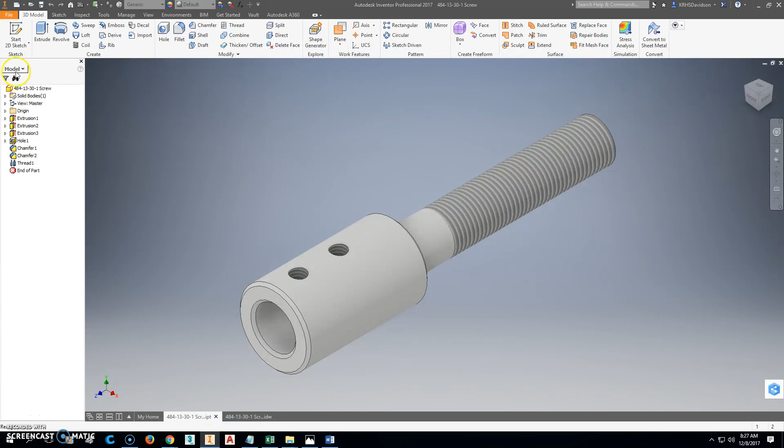Click New. We're going to start a new drawing there. Start a new sketch. Alright, so one thing I want to do is everything's going to be based around a center point. So I'm going to click this right here to turn on a center line. And I'm just going to draw a line that goes from here down here like this. And escape. And I'm going to say that the midpoint of that line goes right on the origin point. It's fully constrained. The length of this piece doesn't make a difference.

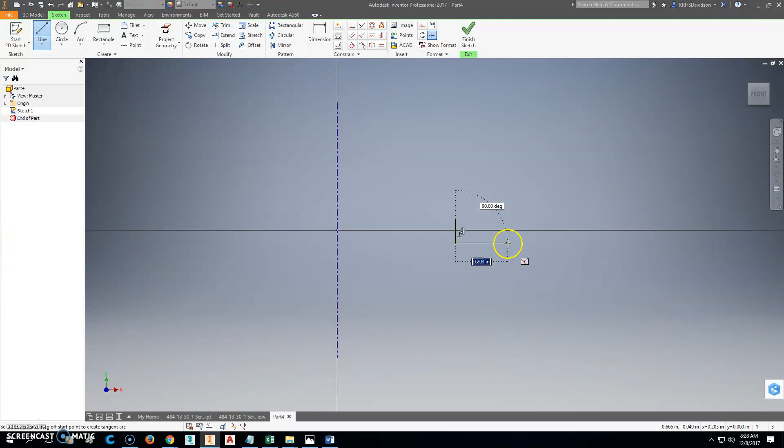So then we'll go out here and what I really want to think about is this part right here. I'm going to sketch that right there, and then I'm going to revolve it around that center line I just drew. So we'll go back out here, and I'm going to turn the center lines off, and I'm just going to sketch this shape like this. I don't know if it's exactly right, but that's kind of what we want it to look like. So that's the basic shape of that sketch.

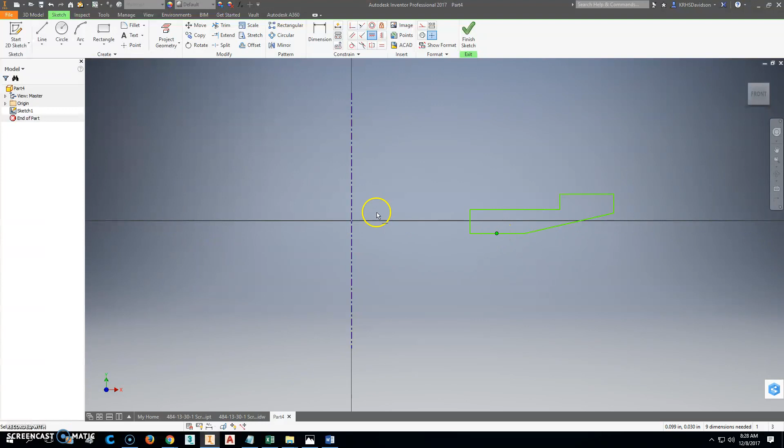As a matter of fact, I'm going to do a horizontal constraint between that midpoint there and the origin point. So that puts it up on that. So now we can start doing dimensions. Watch what happens. I'm going to click dimension. I'm going to dimension from this line right here to that point right there. And see how it puts that all the way out there? It's trying to tell me this is a diameter because it automatically knows it's going to revolve around that. And if I remember correctly, that was 1.2. So that one's 1.2, so that's good.

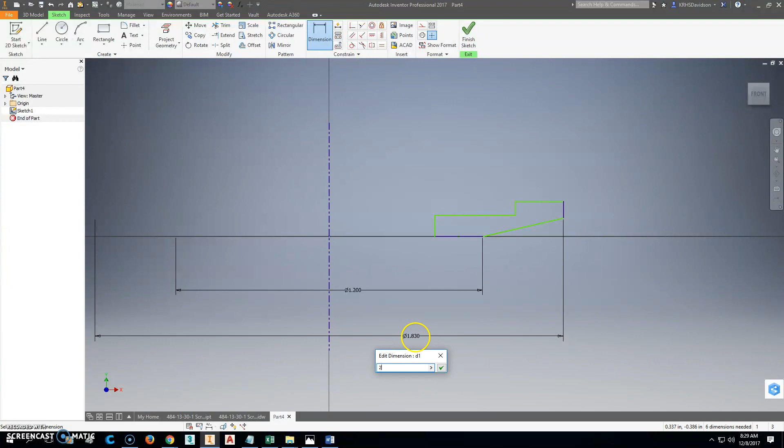Alright, that's 1.2. Oops, did I mess that up? So 1.2 is there. I'll do a dimension that goes from here out to here. That is exactly 2. Then we'll start worrying about these dimensions right here. So that's 0.02 thick right there. This is 0.12 and this is 0.25. So we'll dimension these pieces here. We'll put a dimension on from there to there. That makes that 0.25.

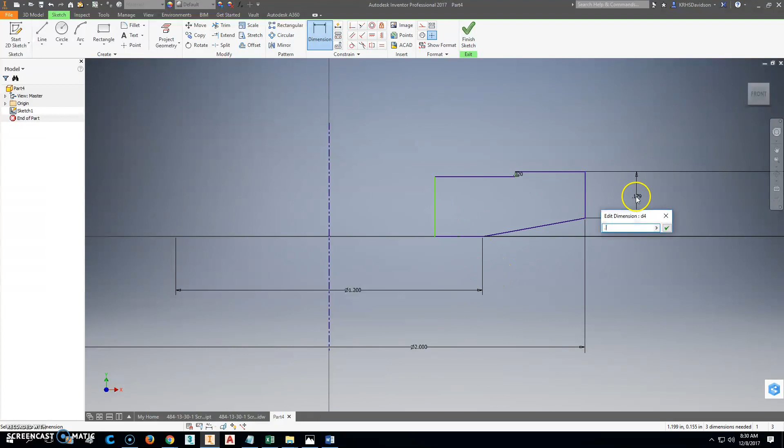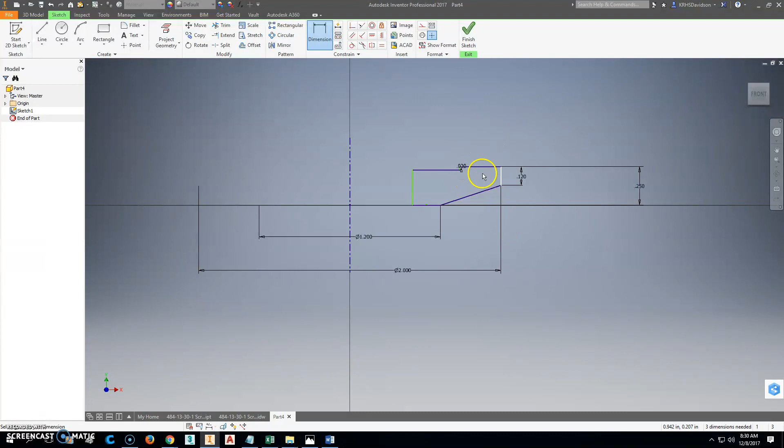This one was 0.2. No, 0.02, wasn't it? Let me double check. 0.02, correct. And then this part right here was 0.125, I think. Oh, it's just 0.12. So that's that. So 0.02, 0.12, and 0.25. Oh, and we need to know that dimension right there.

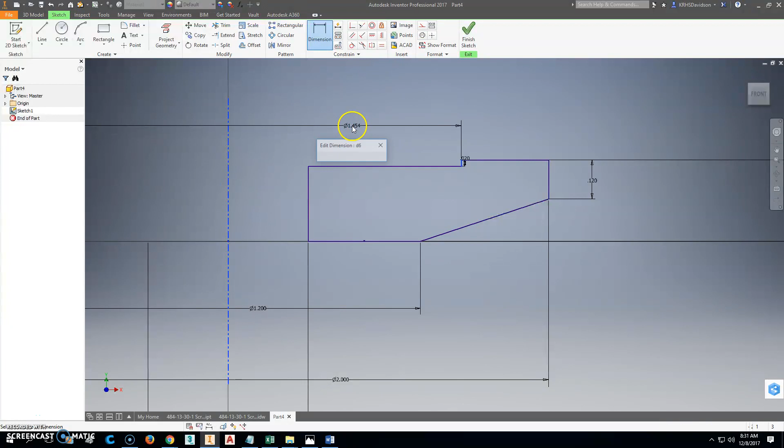That one right there still needs a dimension. So we're going to put a dimension that goes from here to here, and that was 1.5. Now it's telling me it needs one more dimension, but it's all blue, so I'm assuming it has something to do with that center point right there. So we'll finish this sketch. We will revolve this around that right there fully, and so that's it.

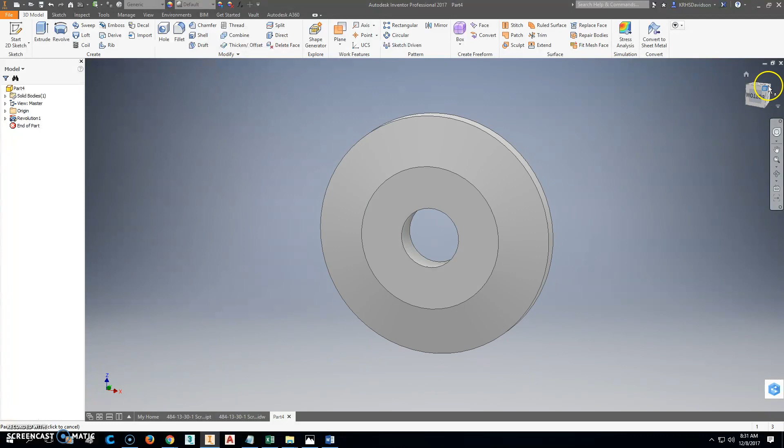That's our part. I'm going to change the view here to go up like this so we can see what that part looks like. I'm going to make that my home because that's what I want to look at. But we can also go this way and see what the back side looks like. That's what both of those sides look like. So you're good there. Save this part, and we're going to call it 484-13-30-2, and it is the flange.

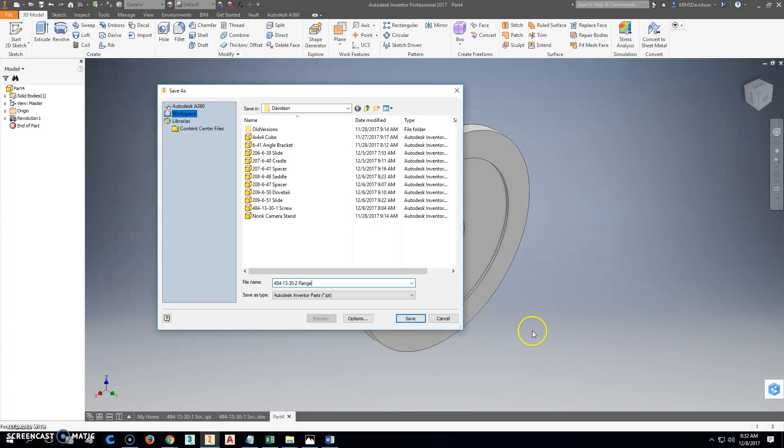Flange. Once we have that part saved, then we're going to go and create the drawing for it. So click New, click Drawing. This is an interesting piece because of the size of it. We're going to change this to go this way to look at that.

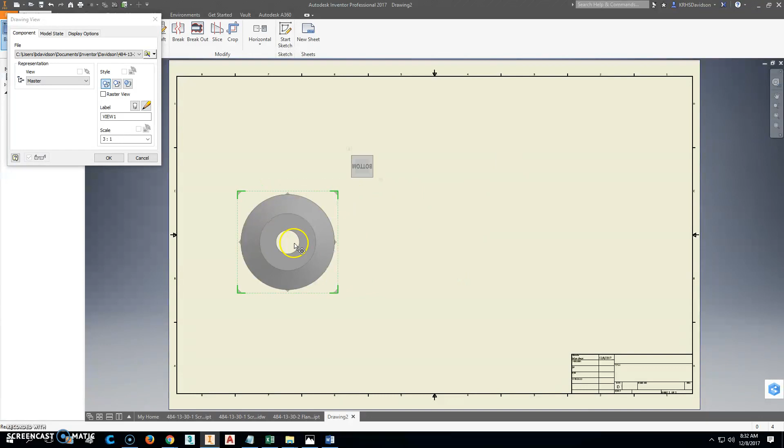We're going to do this one this way. Right click, OK. And then, oops, we want to project this view off this way, and then right click and create and project this view over here. Right click and project and create there.

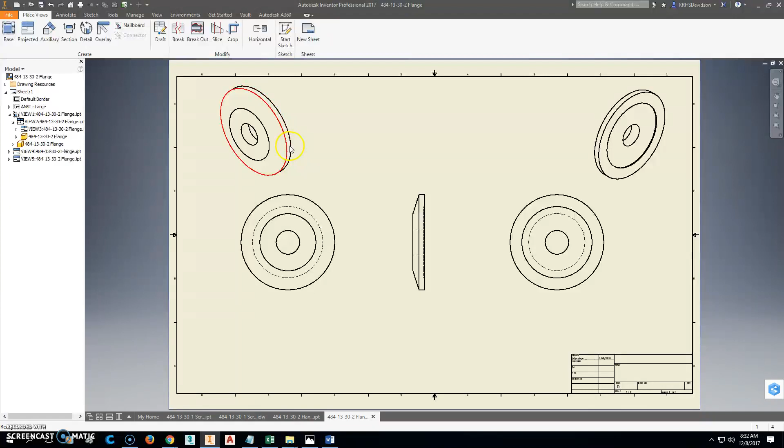So we created that. We can also project, let's see what happens if we project from this view up to there. That gives us a good idea what's going on. We could also do that view if we wanted to, right click and create. And just for giggles, what I probably would do is move this over here so you can see that.

Alright, when we do the dimensions, we'll start with center points. So we're going to put a center point on that one, put a center point on this one. We'll do the center line bisector right through the center of this right here. So now we've got that in there, so we'll start dimensioning here. We're going to dimension this hole right in here first, and that one goes through. Oops, caps lock on, through.

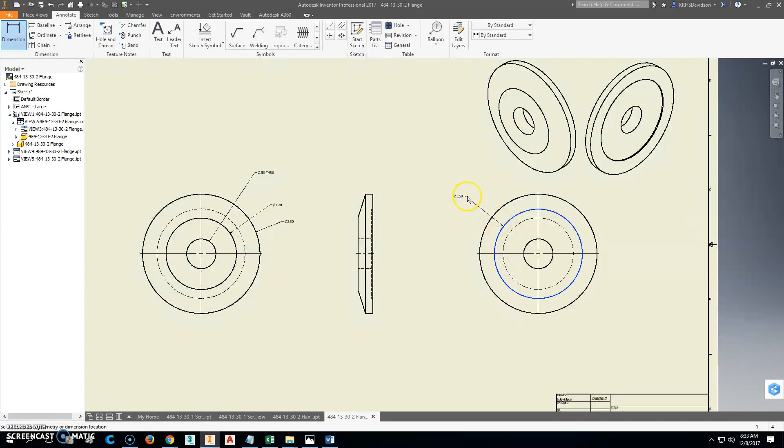We'll put a dimension on this right here that tells us what that diameter is, and tell us what this outside diameter is there. We'll also come over here to the other side and put a diameter on that one right there. Now where it gets really kind of tricky is when we start doing this piece right down in here.

Alright, so we've already decided what that is right there, so we want to just give it thicknesses. So we'll say that this piece from here to here is 0.12. I'm probably going to take that and click cancel. I'm going to hit escape and go that way and put that there. So it's on the other side, so I can dimension this line and not have a problem. And do a dimension that goes from here to here.

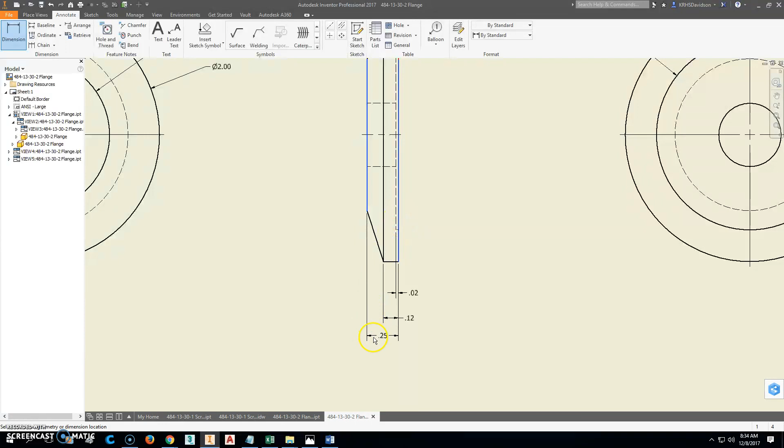Alright, so we've got that part. So that's now dimensioned. Let's see if there's anything we missed. So we got the 2 diameter, that one. We've got this diameter. Oh, look, there's a chamfer right here. So we dimensioned everything else but that chamfer. So we got those and that one on there. But that chamfer, we didn't even make that on our drawing.

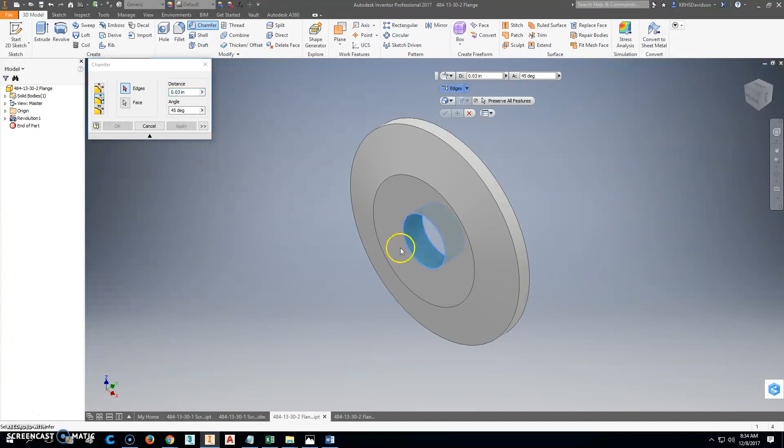So let's take the opportunity. Let's go back to here and see what happens. We're going to click on chamfer. We're going to make this with the angle there, and that is a 0.03 chamfer. So we'll click that right there. I'm going to click that edge and this edge right here, and it puts that chamfer right there on that. So see, now that chamfer's in here, right?

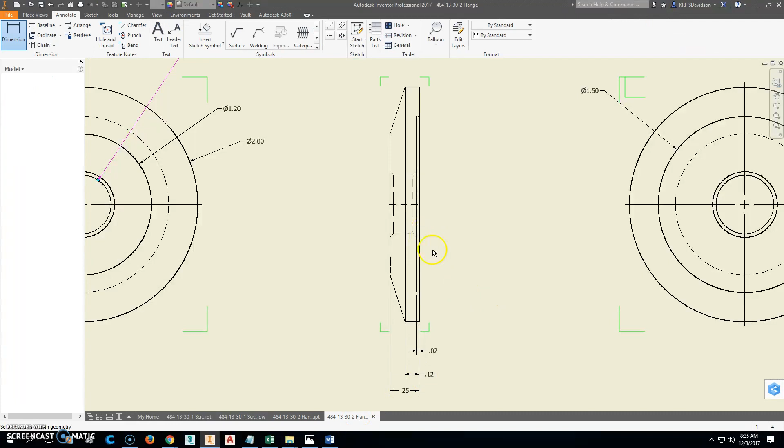And because this is a parametric program, when we go over here, this is now automatically updated. So we're good. So now we'll put a dimension on here that says that, hey, that just was weird. It's there. Come here. Okay. So we're good. I'm going to do a leader on.

Wow. So, well, that was fun. Just did an 8-minute video and everything crashed. Alright, hold on. Alright, so I fixed it to try it again, so we're all caught up.

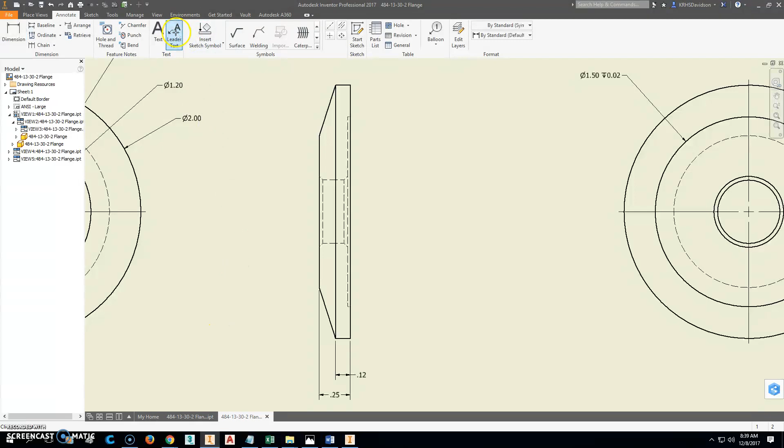I'm going to go here, leader. We're just going to put a leader right here on that part. And right click and continue, and we'll say that is a 0.03 by 45 degree chamfer, 2 places. Okay, so that changes that up. Ooh, I don't like the way that, there should have been spaces there. Want it to be neat and readable.

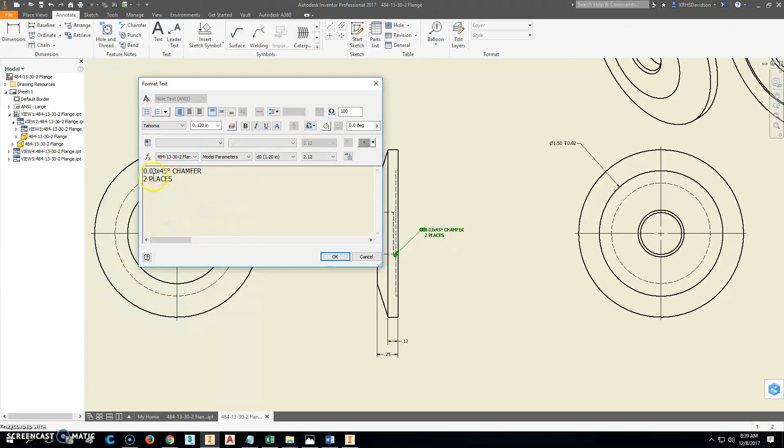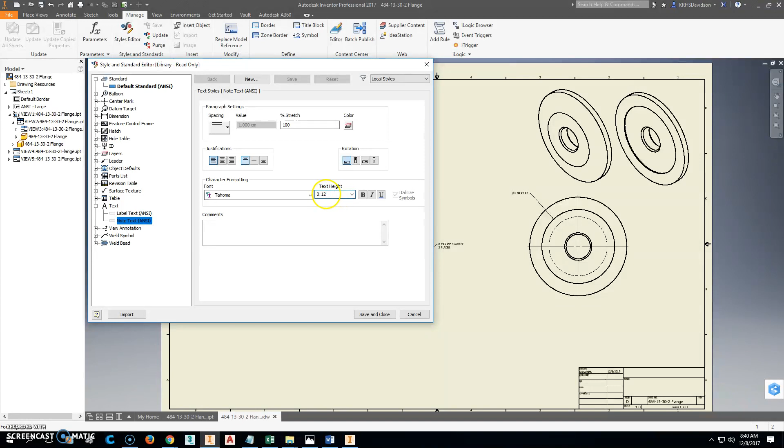So then we got that part figured out. We'll go up to save and save as. So we're saving that as the flange. We'll go to manage, change the style here, so we can change our text to 0.12. It's a little big, but 0.12 is probably fine. Save and close, and it changes all of our text height to what we need to, and we will change the properties then to, oh, it already laid all this stuff out for us in here.

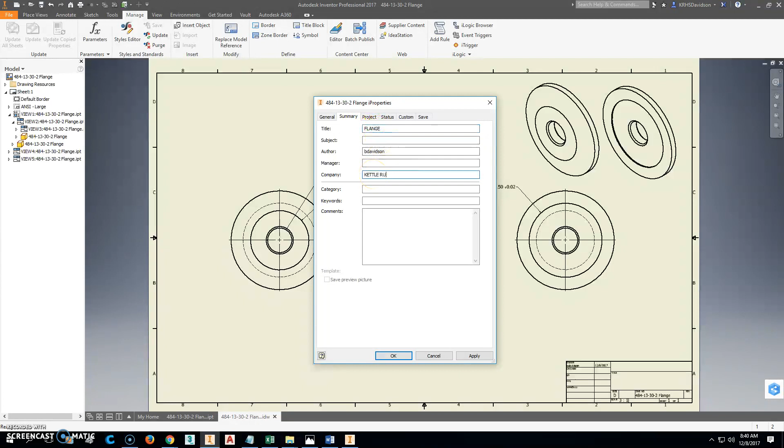We're going to take that name out of there, and we're going to put it in the part description here as flange. Oops, I want my caps lock on, and click apply. Oops, let's go back to summary here, because we're going to call it flange there also, and we're going to call our company name Kettle Run Engineering, and then click apply and close. So that should be it. Save it, and then we will save as, export it as a PDF file, and that's what you'll submit in Blackboard.